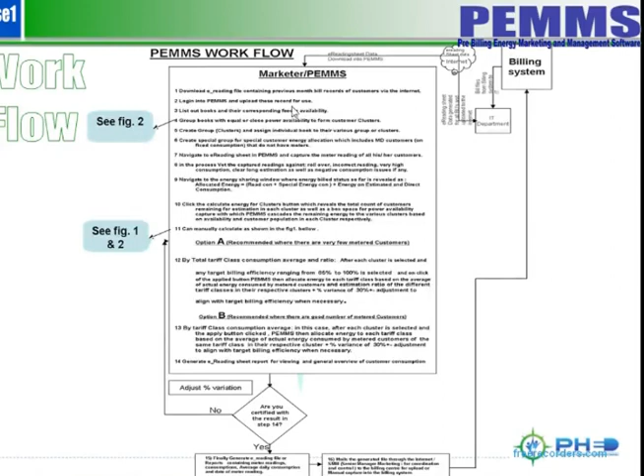This is just the overview, or the table view of the workflow. This is the input at every stage. These are the inputs, and these are the activities that go on at the various stages. And here we have the output.

So in the very first stage, energy is being allocated to the marketer. What's the activity then? Energy is allocated to the marketer, and the marketer becomes aware of the energy consumed by his or her customers.

Then in step 2, the marketer downloads the e-reading file of previous records. That is, the file coming from the billing center is downloaded by the marketer and dropped into drive C, and that will replace the previous e-reading sheet file in his system.

Then the output here is the remaining energy is now well cascaded to each group accordingly. Then a certain percentage of billing efficiency is chosen or selected. Each cluster is selected with a specific billing efficiency, and on click of the apply button, Pemms then allocates energy to each tariff class based on tariff class average and ratio in each cluster. So remaining energy is cascaded to the remaining customers across the group or cluster successfully, and the final billing efficiency is revealed.

Then the e-reading sheet becomes a final e-reading sheet, which is an input for the billing system, becomes a final output.

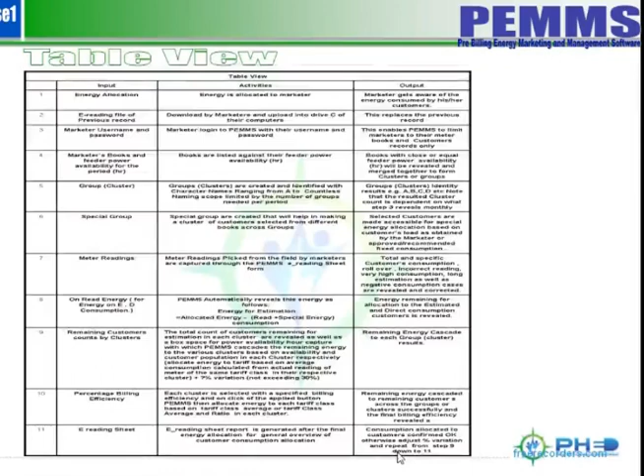The e-reading sheet report is generated after the final energy is allocated for general overview or customer consumption allocation. So this consumption allocated to the customer is confirmed okay, otherwise an adjustment, a certain percentage adjustment variation, is repeated from step 9 down to step 11.

We are still on the Pemms workflow table view.

Here we have the e-reading data as an input. This e-reading data is actually the final product, one of the final products from the PEMMS application after the billing, the readings and the billings, the energy sharing activity is concluded.

The e-reading file or report that has been generated by the marketer contains meter readings, consumptions, average daily consumption, and date of meter reading. And then that resultant file is made available to the billing center via the internet or through the assistance of the ZMM.

After the ZMM is done checking and confirming the validity and accuracy of those readings, and even the consumption, he then mails the e-reading data to the billing center. And there, at the billing center, the readings and the consumption are then made ready for billing.

After billing is done or concluded, bills reports are generated. The closed bill files from the billing center are then sent to IT for processing of bills in A4, and a new e-reading sheet has been generated for the next billing cycle.

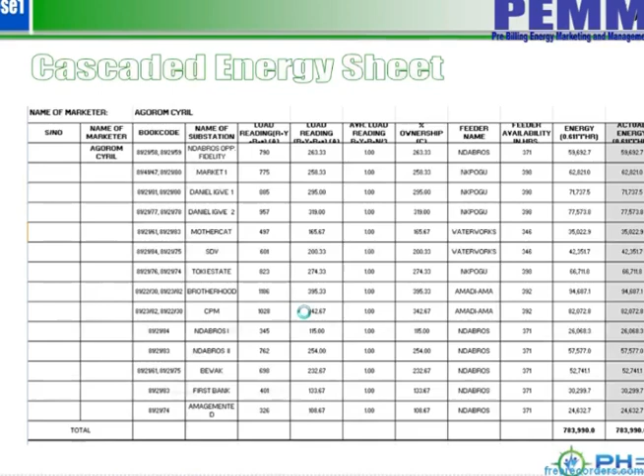So from here, we're going to list out the various books by the feeders and also by the feeder availability hour, like you see here. So we have the books listed down here, the feeders they are feeding from, and the availability hours of each corresponding feeder.

And now we are going to group these books, group the books and feeders based on availability, to form clusters based on the availability of the feeders. So feeders of close availability hours can be said to belong to one group. For instance, 346 and 346 implies that these two feeders, these books belonging to this feeder, should belong to one group.

And then you see 398, 392, 392. They are much closer, they have close availability hours, though they have different feeders, coming from different feeders. So both these and the 398 here, that is the Nkpogu feeder and the mother feeder, all group together or come together to form a cluster.

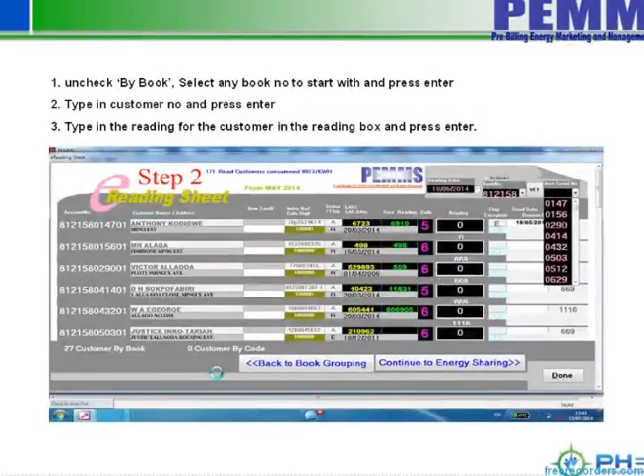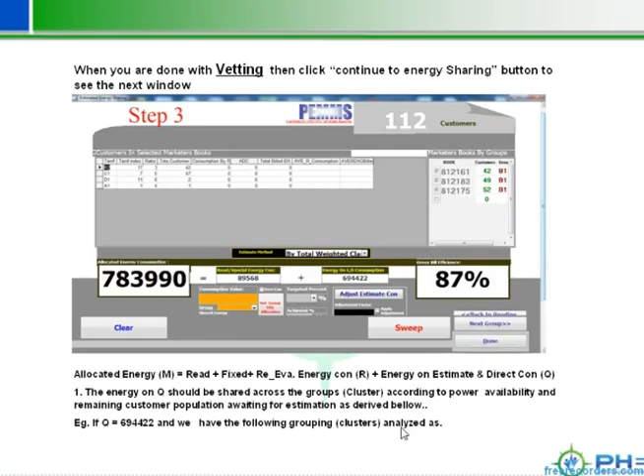Okay, so the energy on Q should be shared across the group according to power availability and remaining customer population awaiting estimation as derived below. So if Q is equal to this, and we have the following group cluster analysis, 67%, 16%, and 17% would definitely be assigned to the corresponding books.

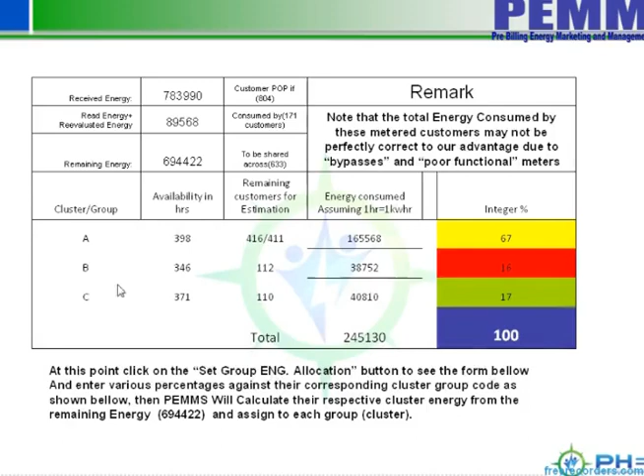So we come here after clicking the set group button. We just come here and then type 67% for group A and press enter. It's going to calculate 67% of this energy and assign it to A, which is this, and 16% of that same energy and assign it to B, which is this, and 17% of that same energy and assign it to C, which is this.

And then D is not a compact cluster, but a distributed cluster. So it consists of customers from different books and clusters. So this group D is not inclusive because group D is not a main group. It's just a group that enabled us to be able to group accounts from different groups, which might be group A, group B, or group C, and then allocate special consumption to them, which we did before now.

Once that is done, you can now select using the first method - by tariff class consumption average and ratio. You come here and click, select the group here. Like here you pick the first group, and when you click it, it will display the energy that's already assigned to that group.

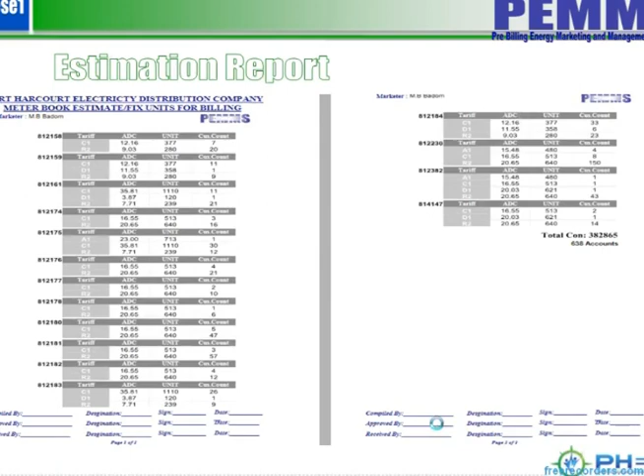But note very importantly that this estimation capture will be done after those that are metered are captured. Once the metered customers' readings are captured, then you get all these estimated customers being billed according to the marketer's evaluation for energy allocation assigned to each customer. Then for the reading reports, a file like this is going to be generated.

So the billing center operators just capture the account numbers and the readings. These are the readings and account numbers, and that should be done first before the estimated customers are captured as well. But these are for cases where you need to capture manually in the billing system. And then you can also generate the summary and the energy loss report.

This report reveals to you the total consumption of energy by each cluster, assuming each cluster is connected to a feeder or a transformer. So you have the total energy consumed by them, and you have the total customer class, feeder by feeder.

You have the total number of metered customers here. You have the class average load of metered customers here, and then you have the total load of metered customers here. You have the weighted class average load. Then you have total number of customers on estimation here.

So by the time you're done with this, you have the total consumption consumed by these estimated customers, and then you compare it with the total energy remaining for estimation, or the total energy assigned to this customer. When you get the difference, you discover you only have a difference of this value, and when you calculate the difference from the total allocated energy, you have an assumed or expected loss of 54%.

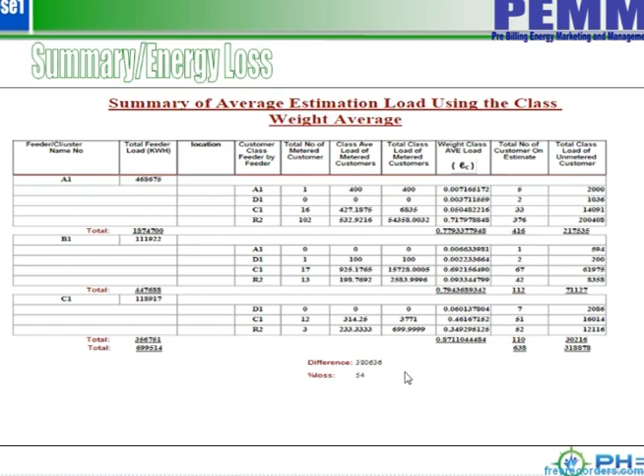When you use the second method or approach to do the estimation, at the end whatever you get is assumed to an extent that it should not be that different from the actual energy that should have been given to the marketer. But that can only be true if every other measure is in place, like there are no bypasses in the metered customer premises, the meters are working fine and not faulty, and everything is working fine, meaning the readings of the metered customers are absolutely correct.

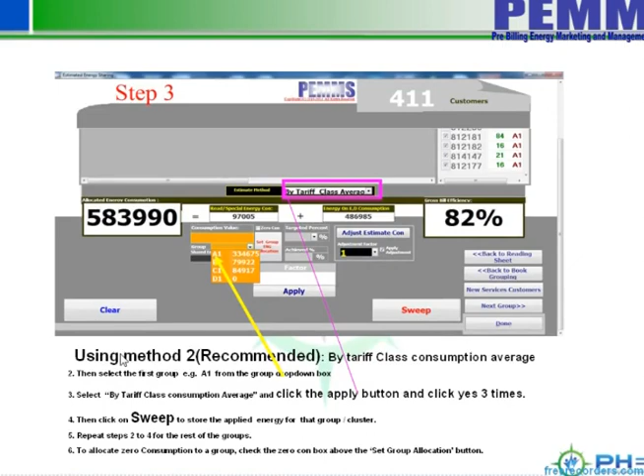Then whatever energy you get as a marketer after you've used the second approach to assign consumption to the estimated customers should not be far different from the actual energy that was consumed, except there are a lot of customers in your network that are not on the billing system, which you have to ensure you capture into the billing system to ensure the second approach gives you the best result expected.

Now, in a situation just like we are moving into a new billing system, where you don't need to do manual capturing of the readings or estimation consumption, the PEMMS application has the ability to generate an automatic file that gives way for automatic uploading to the billing database. So once you are through, you just go and generate this file, and the file looks like this.

Here you have the account number, here you have the readings. Where you have 0 it means those customers were estimated. Here you have consumption, both for those that were read and those that were given estimation. Here you have the consumption displayed, and here you have the ADC displayed. Here you have the date the meter was read, and that continues over here.

So once this file is sent to the billing system, and if the billing system itself is configured to upload this file into its billing records, that can be done automatically and seamlessly. This, of course, goes a long way to eliminate human errors during capturing, ensuring smooth and accurate data entry into the billing system.

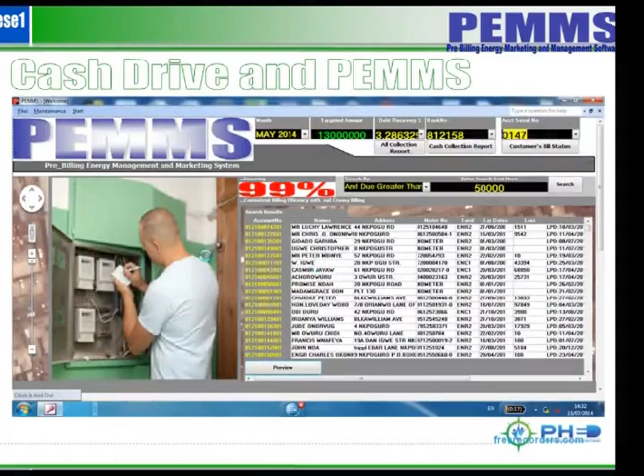This is a sample report of what we're talking about, the cash drive report. The record here can also be SMSed to customers. As a marketer, you can SMS this record to your customers and tell them please pay the target amount.

A customer may be owing so much, but all you need that customer to pay is their current charge plus 30% of their arrears, which amounts to what we have here as the target amount. So when you SMS this to them or call them and tell them please pay this minimum amount, you let them know this is the minimum amount they ought to pay. If they all pay this minimum amount, and you distribute energy worth 12 million, you will definitely collect the 12 million plus a certain amount of the arrears.

For the selected books against this marketer, you have the total current charge by book, by the total customers of this marketer. This is the current charge, and this is the total amount, total due by all the books of the customer.

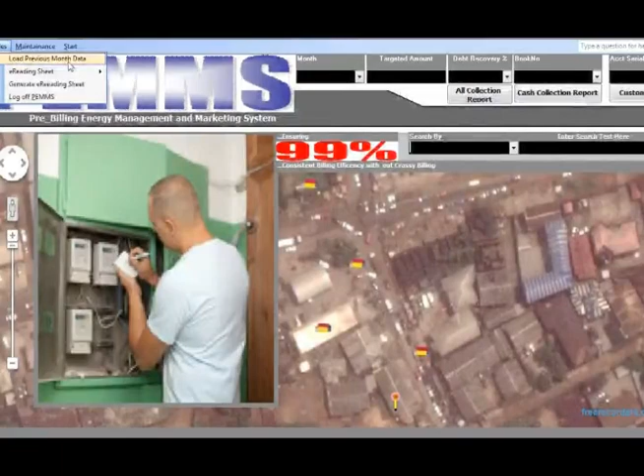And then you come to the file menu, you click load previous month data. That means you are now importing that data into your PEMMS. So what PEMMS is going to do is delete the old data that is stored in the database here, and then bring in this new data that you just dropped on your drive C. So click it.

Then you have this dialog shown to you. All you need to do is just keep clicking yes, yes, yes, and yes, until you do not have any more dialog displayed to you.

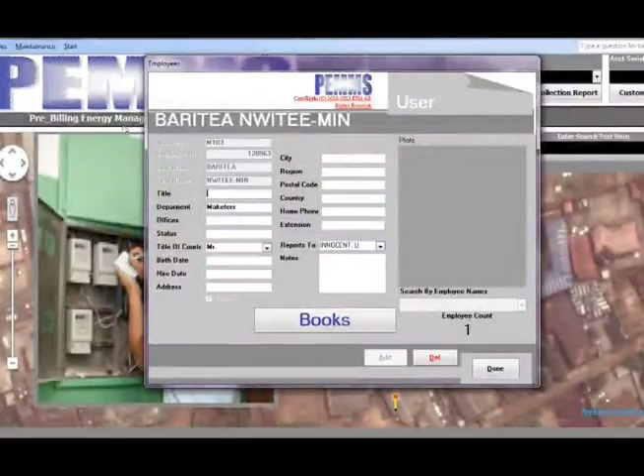Then the next thing you have to do is come to the maintenance menu. As a marketer, you click on marketer info, and then you click on books. Then you capture your books here if your books are not being captured, all right?

So, like I said, this is the environment where you capture your books. For instance, you have these books. You just click inside the field and capture your books one after the other. If I want to add another book here, I just click and type 820014, for instance, if there's any book like that.

Once you're through with this, you have to cross-check to confirm that your books are captured correctly, that whatever you have there is okay. If a book is not correct and you want to delete it, you just click the delete button by the side here, and that book is deleted.

By the right side here, this is where you select the month that contains the e-reading file that you downloaded or uploaded into PEMMS. If you look at this place, July is already selected. That means the last time this stock was used, July was the current month. Now the data we just imported is the record for August bill.

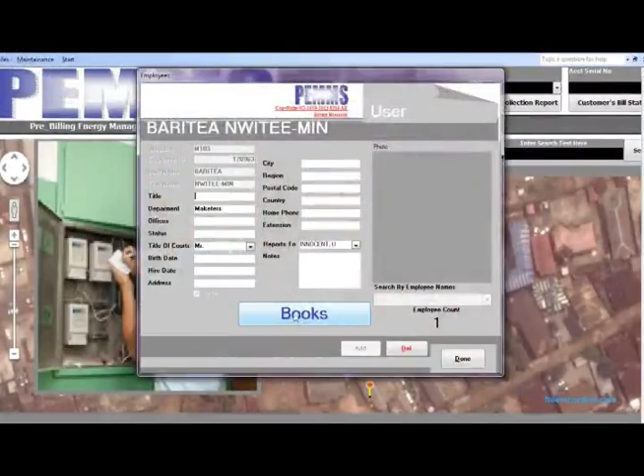Then back to our PEMMS, we go over there to maintenance, marketer info, then books. I delete this blank space, right? So back to September, and then you're sure everything is correct. Once this is done, you're good to go.

But remember, as a marketer, when you are moved or transferred to a different location, all you have to do is open up this environment and delete all the books that you already have here, and capture the new books of the new location that you transferred to. Is that okay?

Okay, so once that is done, you click done. You don't always come here except you need to update your books, or you need to select a new month and assign the energy cascaded to you here. Then you click done when you're okay.

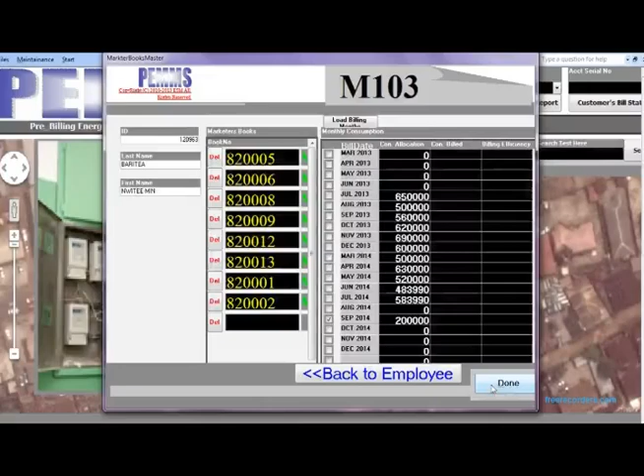Remember, the first thing we did was to load previous month data. The next thing we just did is update our books and ensure that we assign the cascaded energy given to us as marketer in their respective places. Then the next step is to create a group.

But how do we create this group? Remember, when we were going through the overview and the four powerful dimensions of PEMMS, we discussed how these groups could be created. We talked about when you align all your customers. Maybe we have to go back there again. Let's take a look at it again.

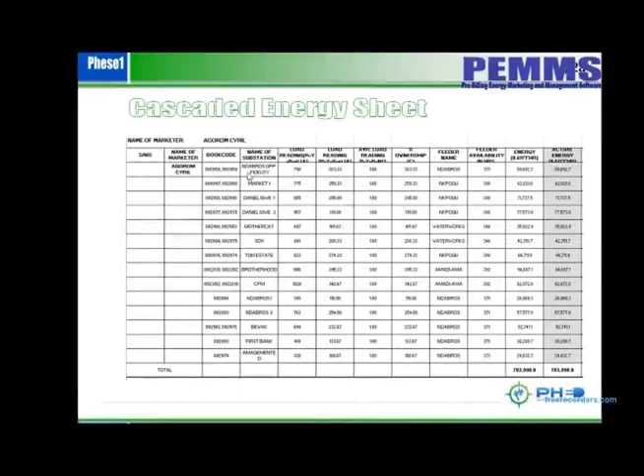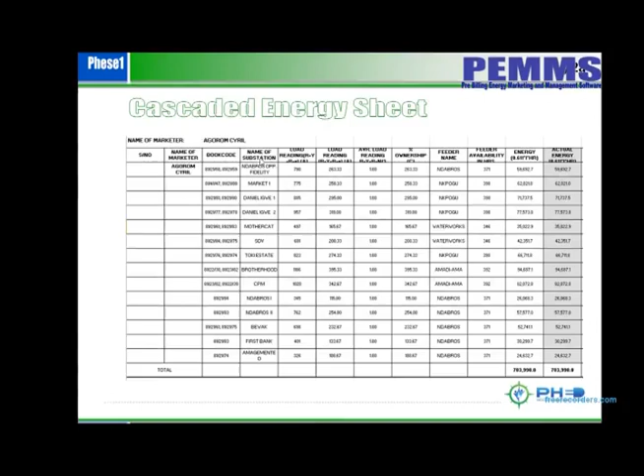This is an example of the energy cascaded sheet, showing an allocation of energy to the marketer, book feeder by feeder, book by book.

When you list out your books feeder by feeder with the corresponding availability, it becomes easy to group each book or feeder based on feeder availability in hours. Looking at this list with numerous feeders, you discover feeders with close availability in hours form this group C, including this other one, because they have the same or close availability.

Looking at this side, you have 398, 392, 398, and these other 398s. They form together, they come together. If you bring them together, both form one cluster. The same thing with this 346 hours, forming one cluster.

So let's go back to Pemms now. You come to the Start menu and click on Select Create Group. This is where you now decide, because we already saw from the example that we have three groups, plus the fourth group, the special group, Group D.

When you click the Start menu and click Select and Create Group, this window captioned Customer Grouping is displayed. On the left side we have Create New Group, and on the right side we have Select Group. That means here is where you create a new group, and here is where you select the group you've already created and start working with them.

So how do you create this group? When you want to create, for instance, 4 groups, what you do is click here and you will see characters ranging from whatever number you have to the last number. This character may get exhausted as you keep creating more groups, but once exhausted, adding an additional group becomes easy via this link - that is when you are done exhausting the groups you already have.

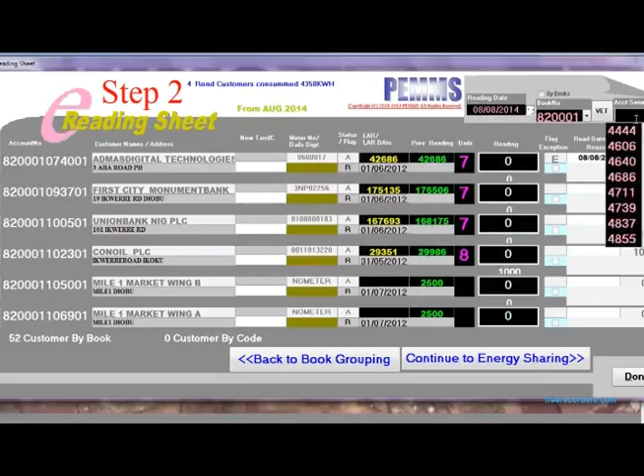So if I click 820001, it will display for me all the accounts in that book. So all I have to do is type a particular account based on what I have on my rough sheet. Type the particular account. For instance, assuming I type this account, it will bring me to where I should capture my readings.

And then let's take an instance, I capture 1062900. Then you press enter. It will show me here the consumption and give me room to pick the next account or type the next account. And then it brings me back here. I type my readings, 28900, I press enter. The same way, you continue the same process with other codes.

Then you type readings, 266900 for instance. You press enter. That's my consumption.

The next code, type 2978774... sorry, type 48000. That's my next consumption. So you keep doing the same process over and over until you're done capturing all the readings of all the read customers in this account.

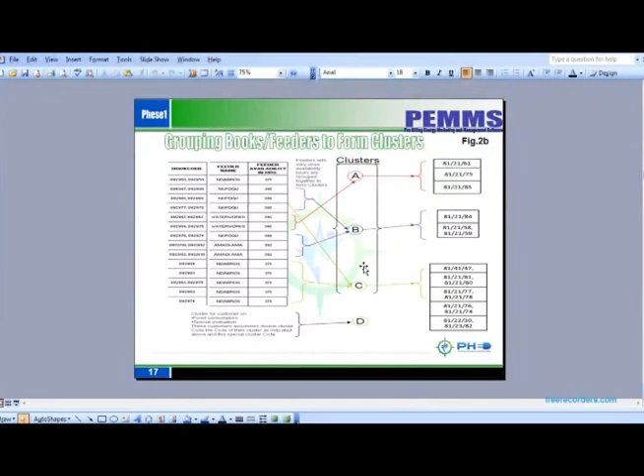So we're going to just assume that this is actually the same scenario. We're going to pick 67% for K1, 16% for L1, and 17% for M1. Let's assume we arrived at this for that analysis.

So we get back to our Pemms. You come here, you click set group energy allocation, and then you come to K1, you assign 67%, press enter. You have 16% here, press enter. You have 17% here, press enter. So when you click done, let's get back there.

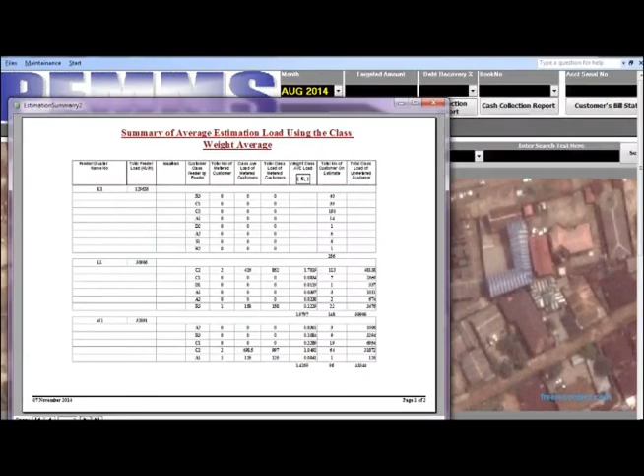Then if you scroll down to the next page, you see all this, and this page shows you the difference between the energy to be shared and the energy actually consumed. So this place shows you the differences - that difference is like 49%, or leads to 49% losses.

But this is not a correct scenario until you have captured all your readings and you're sure all your data is in the system. Then that's what will give you something you can work with, that will make a lot of meaning to you when it comes to having a summary of class weighted average for your environment or cluster.

Then, if you are submitting the e-reading file to the billing system for upload, instead of manual capture, you come to the generate e-reading sheet, and select the month, which is August 2014, because that's the month that has the record you downloaded into Pemms. Then you click e-reading data, and once you click that, you click OK.

So let's take it again. You click August 2014, and then you click generate e-reading data, and this tells you that the text is created in drive C. You click OK.

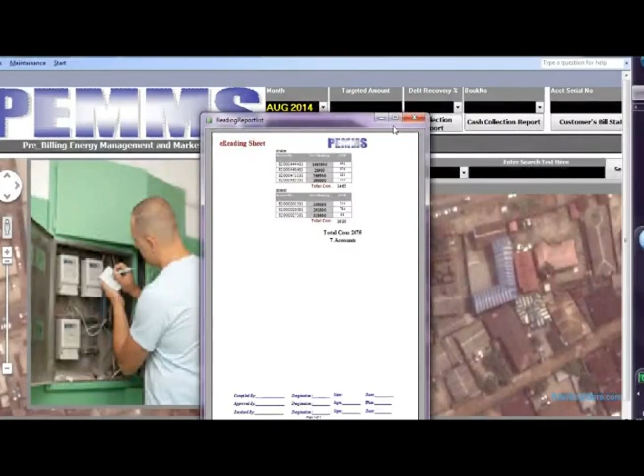So once that is done, you can also repeat the same scenario, or confirm your report like we did previously, your e-reading sheet. When you're done with either method, you come over to the File menu, then to e-reading sheet. You click the Read Customers command to see the report for the reading that you captured, and this you can forward to the billing center if they're doing manual capture.

Then you can also generate a report for the estimation that was done. So when you send this to the billing center, the book code, the tariff class, and the agency will be used to assign this various consumption to the various customers.

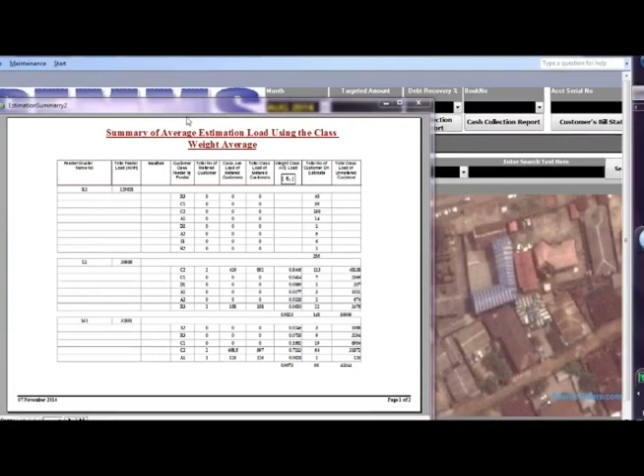Then you also have your class weighted average summary, which you can use to see the amount of losses in your network, assuming that your customers are being captured in a cluster, a very good cluster, maybe on a specific feeder and transformer.

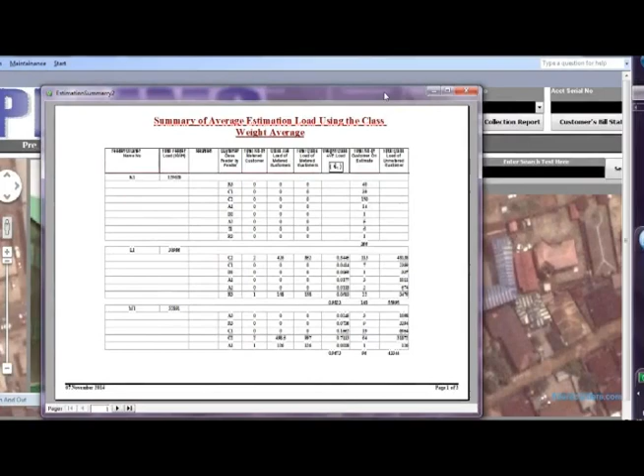It's ongoing right now, the company is trying to mount statistical meters on every transformer or feeder, so by the grace of God it becomes possible to read the energy feeder by feeder, transformer by transformer, so the energy cascade will tend to be a lot more accurate.

So assuming the energy cascaded to this customer and to this market is actually accurate, this will reveal the percentage losses that could be due to transmission losses, technical losses, as well as commercial losses. So the customer and the entire service unit of that business unit need to ensure that transmission, commercial, and technical losses are reduced to the barest minimum.

For the marketer to reduce the commercial losses, they should be able to ensure that cases of bypasses are reduced across their catchment or coverage area. They should identify customers that did bypasses and ensure that they are penalized and warned never to repeat such an act again.

In the process of doing that, we might reduce those losses to the barest minimum, maybe up to 10% or what have you. I believe right now the company is adopting several measures to ensure that commercial, technical, and transmission losses are reduced to the barest minimum. When this is done, more supply will get to our customers, and we'll be able to serve them a lot better.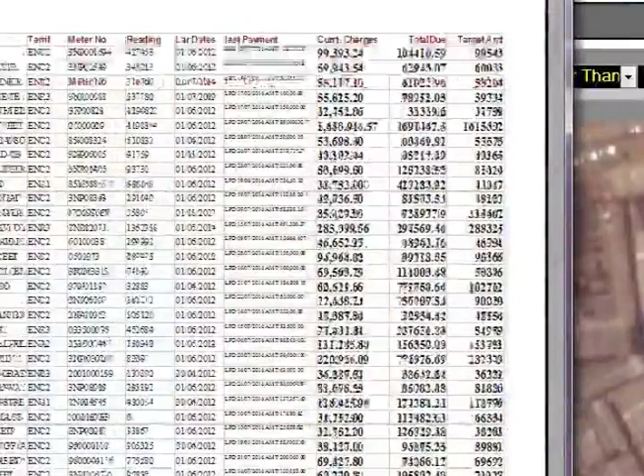Then you can also generate the same report book by book by selecting any book of your choice, and then click cash collection report. It will show you the same thing, and what's supposed to be your target book by book. So with this book, this is where the customers are owing, and with this you'll be able to know the area that is owing you more. For instance, as a marketer the total due that all your customers are owing the company is 337 million, and this book is owing out of that 337 million, 18 million.

This book is owing 50 million. This other book is owing 33 million. This other book is owing 24. This other book is owing 18. And this other book is owing 104 million. So you can do various analyses for the corresponding book, for the separate books, because this book is owing you more, so you can even do an analysis.

You can use different analyses, different debt recovery rate. You can set different targets that will result in different debt recovery rate, and that will help you be able to do different analysis for different customers.

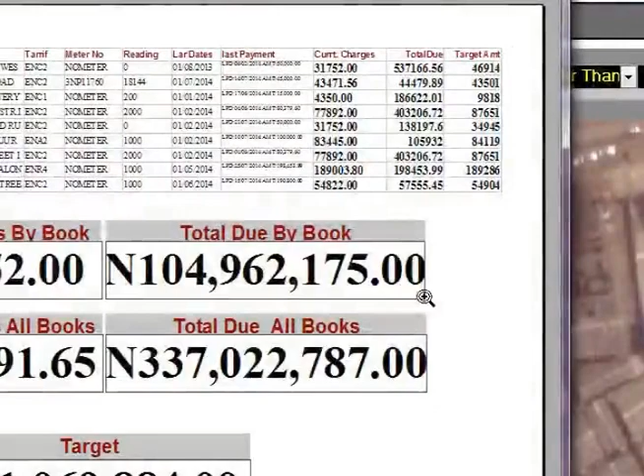But the basic issue there is that you collect your current charge. So you see here, the monthly target current charge is 8 million, but the target is 11 million. So if they all pay what is displayed in this report, you will definitely hit that 11 million. Let's move to the next book.

This book is owing worth 12 million. So you do different analysis for them, debt recovery analysis and what have you, and then you generate whatever you want to generate and use the value to drive your cash.

You can also generate value report for each customer. For instance, like this customer. You can also do more analysis here by looking for amount, custom account, list of account with amount due greater than, maybe say 50,000. You click this button, it will show you a list of accounts with amount due greater than 50,000, and based on this analysis, it tells you what they need to pay you to be able to realize something good.

So you can say list of account with amount due greater than 5 million. You click this, and it shows you these customers with additional target amount, and you just meet them and ask them to pay this, and when they pay this, you're going to hit collect 14 million.

So you can do all manner of analysis here. You can say list of account less than, maybe say less than 100,000. It will show you such list of account. You can preview, and then for each of these analysis, you can set different targets.

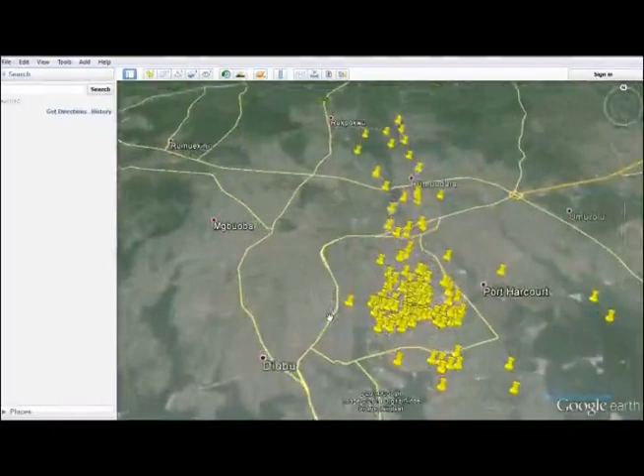Now these are the markers of customers in that book. Let's assume these are actually all the customers of that marketer, and he covers this environment. I'm seeing markers on some roofs, and there are some roofs with no markers. If this is actually the correct scenario of this marketer's coverage area, that implies that where the roofs have no markers signifies possible areas I need to visit to confirm the account status of those houses.

So this is one good way of discovering possible areas where new customers could be found via Google Map or Google Earth through PEMMS. You can zoom down to the various houses, navigate, move this way or that way, as if you are in the space, and then just take a look at what's going on in your coverage area.

And then you can zoom out and pick an account like this one. When you click an account, a marker like this shows you 3 icons, telling you that at that very point there are 3 accounts. 3 accounts here, 1 account there, 3 accounts there, 3 accounts there, 3 accounts there. There's 3 accounts there, 1 account there, and here you have 1 account.

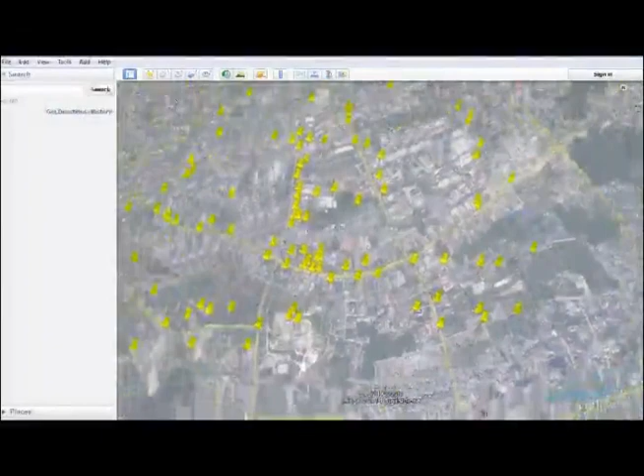So these are possible ways of finding out new customers via Google Map or Google Earth. I believe this will go a long way to help us.

But this approach can only be viable if all the customers we have in the database have that GPS coordinate captured. So there is need for the GPS coordinate of our customers to be captured into the database for this very approach to become viable and useful to the system.

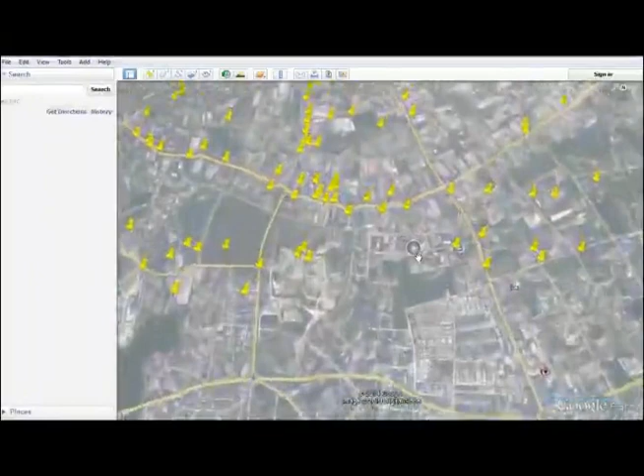And then you can pick an account, a customer or an account. When you click on that marker, it will display for you the account number, the name of the customer, the address, the last payment date and amount, the net arrears, the current charge, and the current balance for the current month.